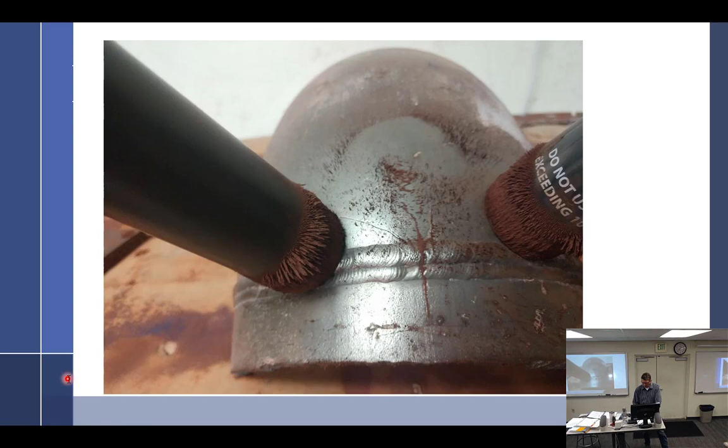Also called prods. So prods are handheld electrodes. You're going to hold them, put them on, clear, pull the button.

Is this direct or indirect magnetization? Direct magnetization. All right, direct magnetization, which is going to produce - would you say circular or longitudinal? Circular. And would the crack indication go this way, or this way? This way, yeah, okay then.

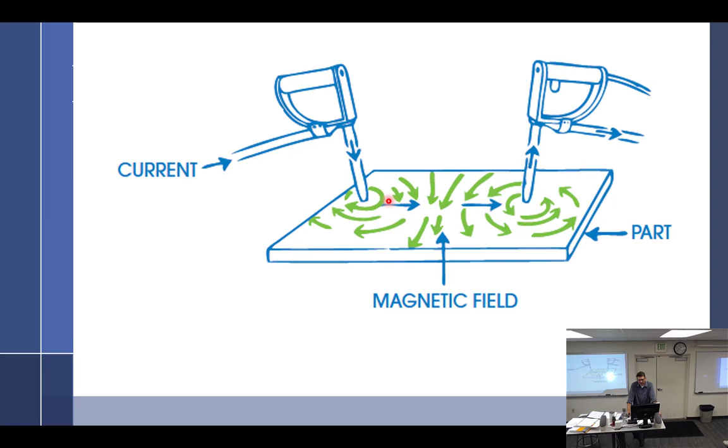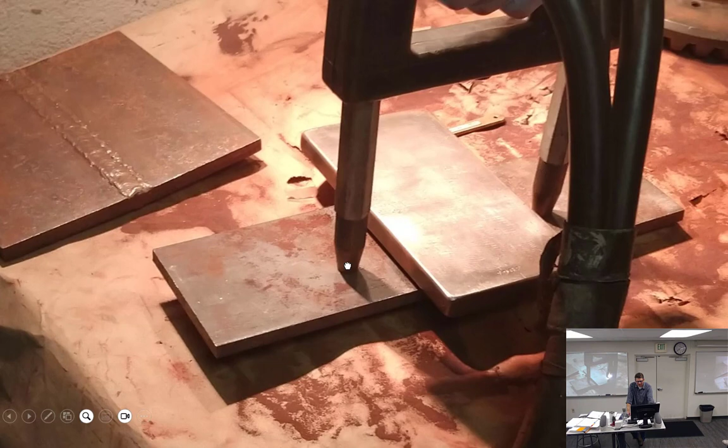So this is me trying to be silly. The indication would go this way, and I had this theory - what happens if you wanted to test for an indication going this way? But the problem is, you couldn't test this way because this piece is fixed and you couldn't change it, and the part didn't fit between.

So I thought, well, what if I put the prods here, and the indication is going this way, right? And I lay this on top. Would it transfer up and make the indication? It didn't work. And the guy's like, what are you doing? I'm just seeing something.

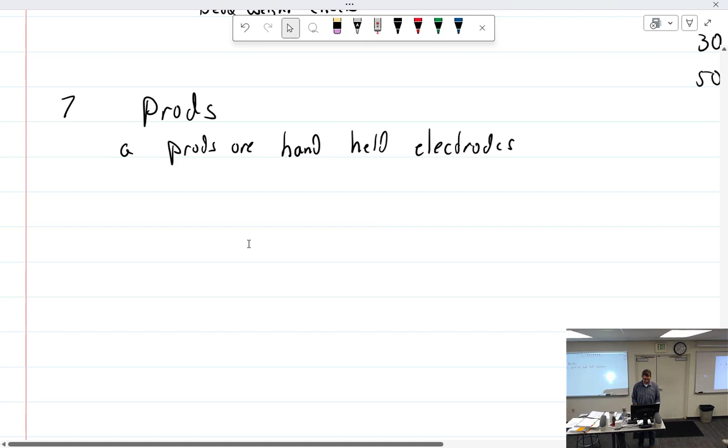What's that? You killed somebody on the table. It's the students who don't listen. Well, it's just rust. As the kids these days say, F around and find out. Maybe I did. What's that? Figure it out. Fool around. What does that stand for? We can't always... well, that's fantastic. All right.

See, current passes through the part. Through the part. Current is through the part. When we run current through the part, what is my risk? Arcing. Yes.

So this creates circular magnetization. Discontinuity shows parallel to the current flow.

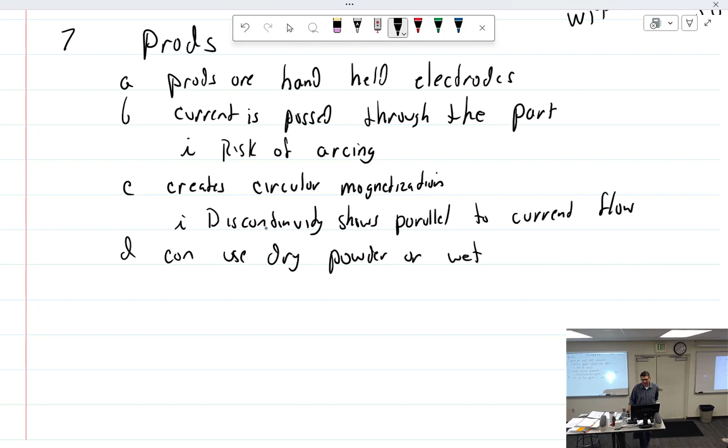As with the yoke, you can use dry powder or wet. So if you use wet, how are you going to get the wet there? Spray, those spray cans. So if you're using spray cans with an aerosol in them, and you have prods that are prone to arcing, and you're inside a closed vessel, or doing pipe welds or something, you have the risk of losing your eyebrows. You don't need those. We've all done it. There's only like a 1 in 4 chance they won't grow back.

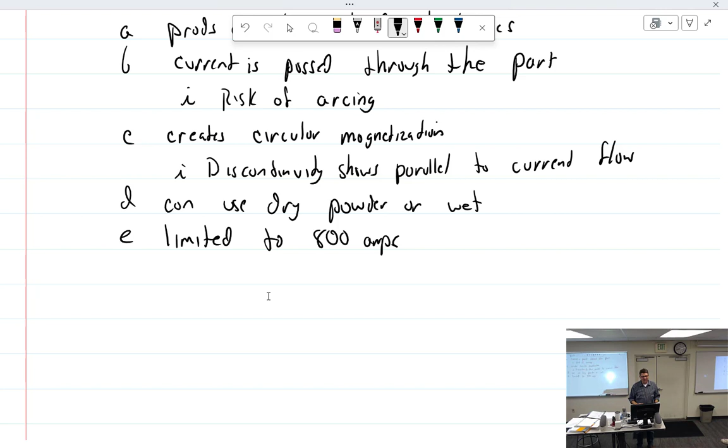Limited to about 800 amps. Why do you think it's limited to about 800 amps? So you can keep your eyebrows, more or less. Try putting more in that - the more amps you've got, the harder you're going to have to lean into it and get a good contact, or you'll start losing your contact.

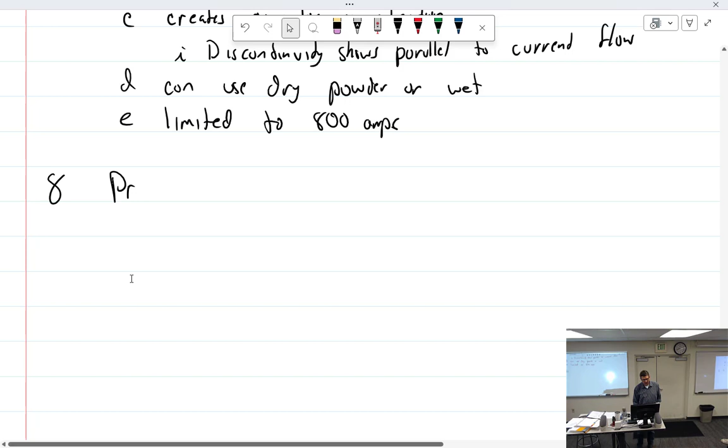All right, and we've really kind of gone over all of this already as we went through each thing, but I'll bring it back up again.

So I kept - there is a log in the lab, and I noticed I don't think anybody's been using it. Anybody been using it? For the Magnaflux? You guys start using it? Yeah, we've been using it. Write everything down.

Okay, excellent. So I kept a log in my shop with everything, every day. It did not matter what table 1 said to me about the intervals. And let me tell you why it didn't matter. Because number one, let's see.

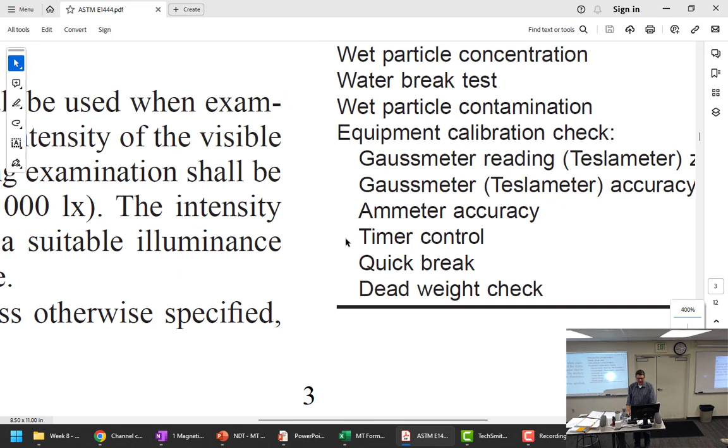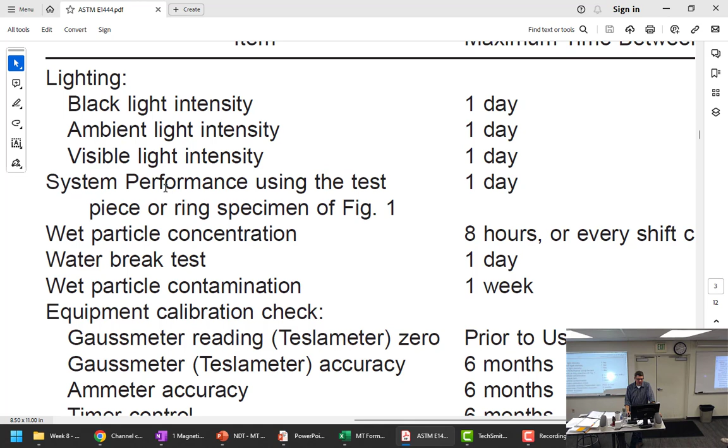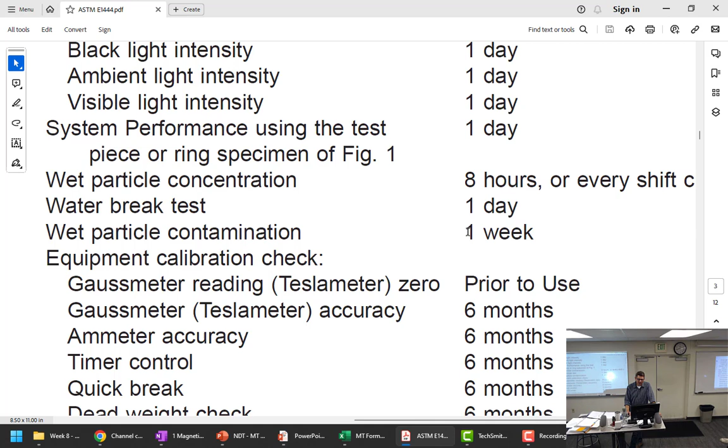I made sure that - I guess I pretty much followed this. I did check my black light intensity every day, ambient light every day, visible light every day, system performance using the Ketos ring every day. So I guess I followed that. Wet particle concentration, yep, every single shift. Water break test, never did that. Or wet particle contamination - I changed out my stuff, according to my boss, way too often.

However, we were only calibrating our machine every year, so there's a problem with that, right? Yes, so that would not meet this requirement. This is out of the ASTM, although I don't believe that the service bulletins we used reference this ASTM.

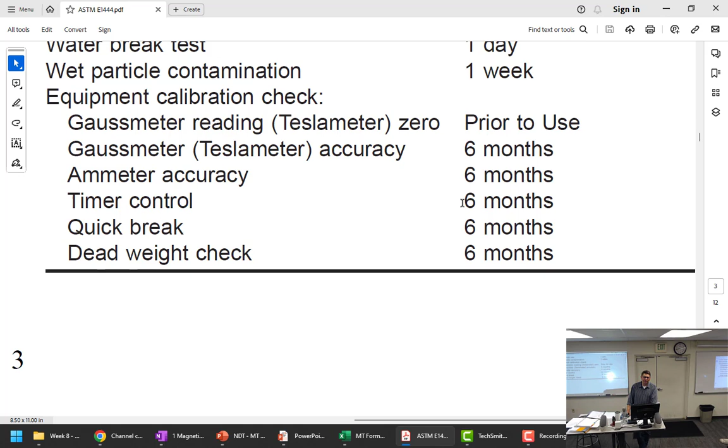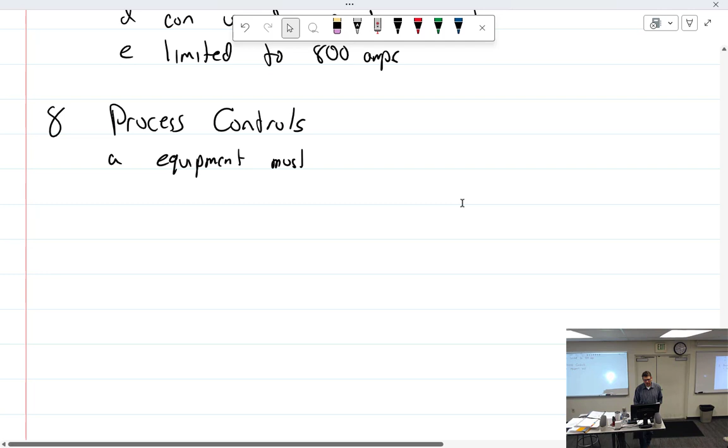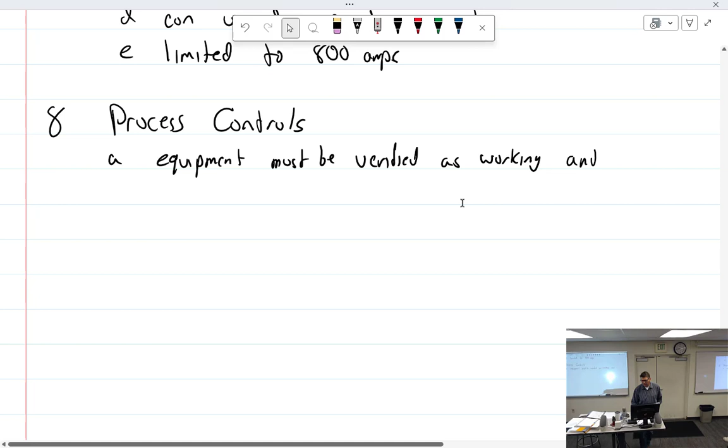So, process control - all right, so we have to have equipment must be verified as working and capable of detecting the desired flaw. I should say the undesired flaw.

What do you suppose happens if your process control is bad and it comes to light that you've been missing things you should have found? People might die. Let's say nobody dies, or somebody does. Then what happens next?

They embarrass you pretty well. When you get into airworthiness directives, especially on smaller aircraft where smaller shops work on things, you probably won't see this on Boeing or Airbus. But in places where smaller things happen, you'll see a lot of shops mentioned by name in airworthiness directives. Like crankshafts - any crankshaft repaired by Nelson Balancing Services between this date and this date shall be removed from service because they were doing something wrong. Larry mentioned there's a place in Stockton that just had ADs come out on their prop work. You'd be surprised how many shops are named by name.

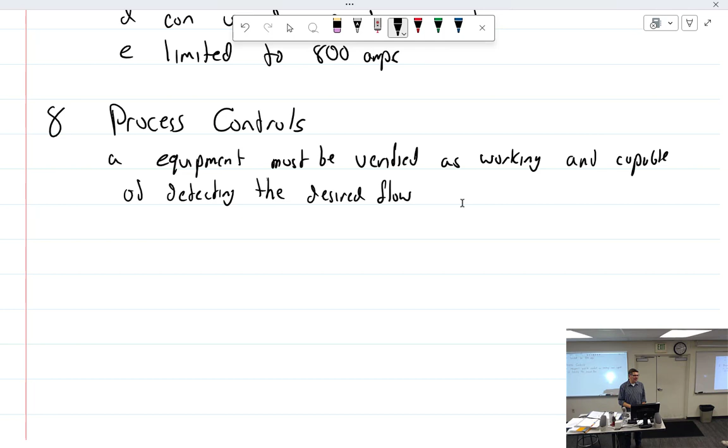How long do you suppose that AD is out there? It's not like they go away - they are there. That's why I remember Nelson Balancing. Why do I know that name? Because I've been looking at it for 30 some years now.

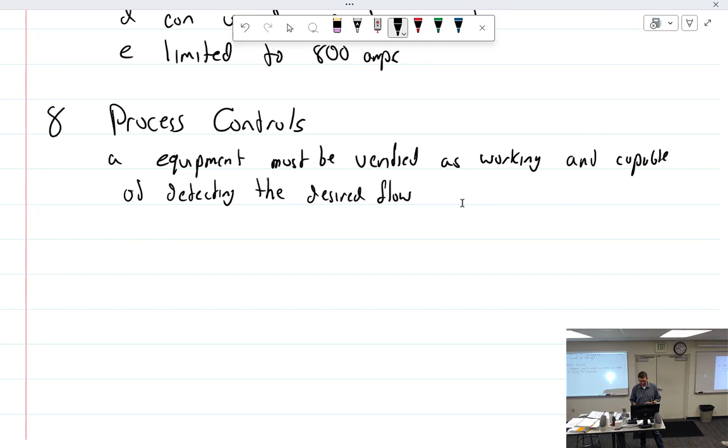Every time I do an annual on my plane, I go through - nope, that one's N/A because my engine was not overhauled. Is it still crankshaft by Nelson? I don't think so. Probably not. All right, time to change the name of the shop.

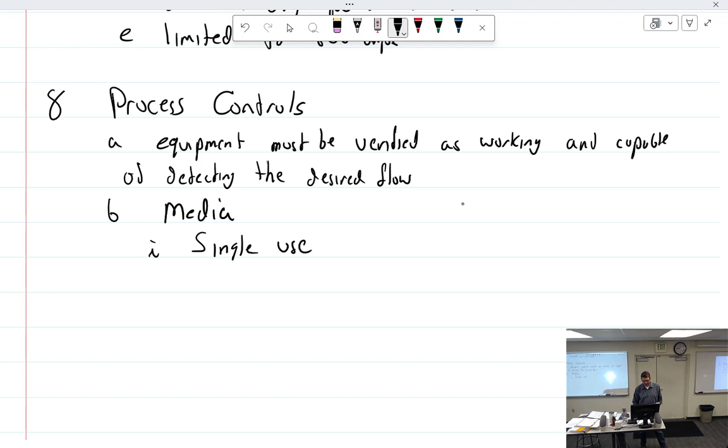So obviously we're going to check the media. The dry powder or the aerosol is single use. Even though you see me pick it back up and put it in a jar, it's single use. That includes aerosol cans.

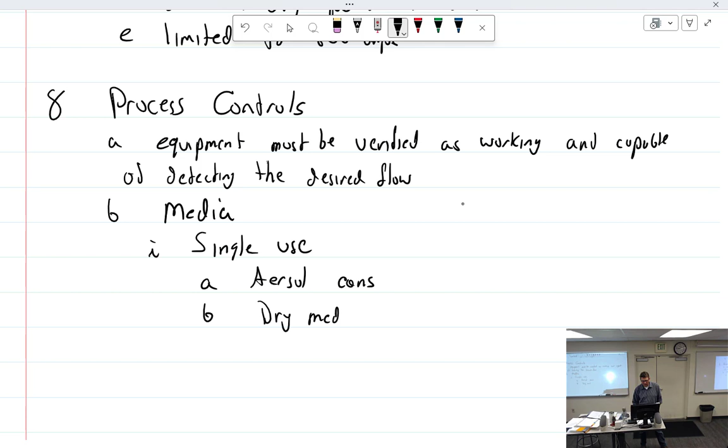You don't put the stuff back in the aerosol can? You can try, it's hard to get in that little hole. Single use - I know you see me reuse it because I'm cheap. We're not supposed to.

All right, it is assumed to be good - uh oh, there's that word, oh no - assumed to be good if used by expiration date.

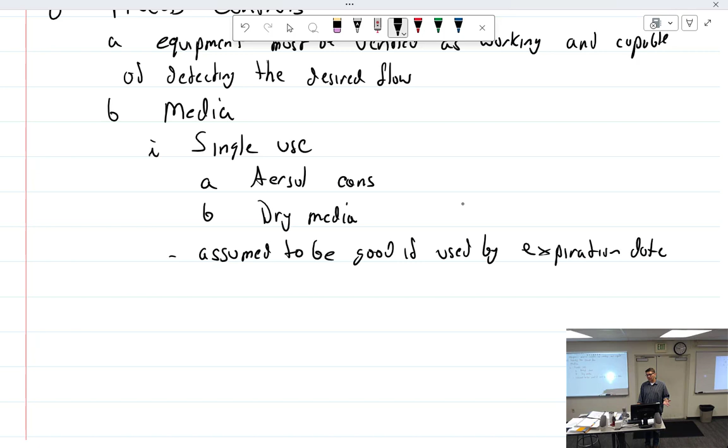Now this is my thing. It will depend on what the expiration date says. If it says 'best when used by,' that's not an expiration date, because it goes best, better, good, gooder, questionable, and then I guess feed to kids and see what happens. My family's so mad at me because I'm always on them - you threw away that, it said best when used by. What comes after best? Best, better, good. So that's the joke.

It will say 'expires on' and have a date on there. So it's assumed to be good if used by the expiration date.

What about sour cream? When it goes bad, does it get less sour or more sour? Oh man, that sounds gross. It starts to look like... you know what I keep telling my kids and won't buy it? You know what tastes really good is lemon milk. Try it, it's delicious - no, it curdles it. I did try that. Oh yeah, toothpaste flavored orange juice, my favorite.

All right, the media in the bath - how often is that checked? Take a bath? Yep. Every 8 hours or shift change. What if the shift never changes? Then every 8 hours.

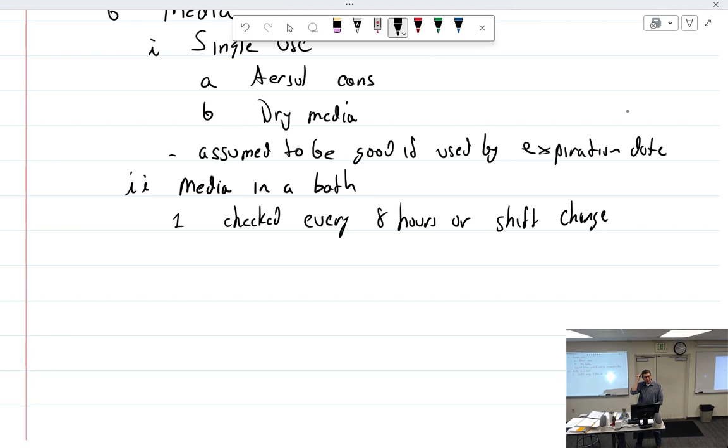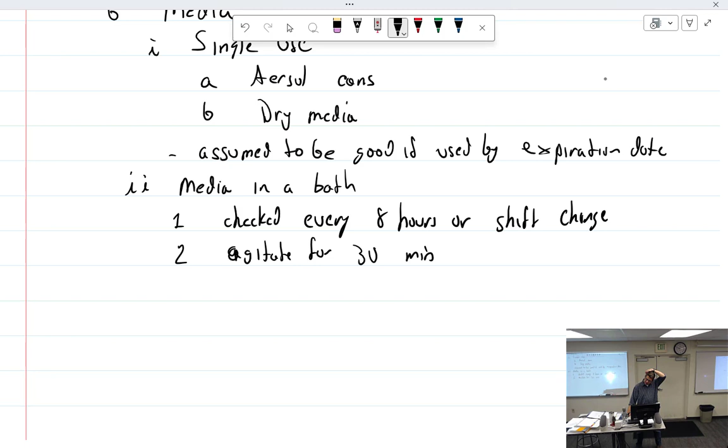So to check it, we have a procedure. We're going to agitate it for 30 minutes. If you don't know what agitate means, ask Cooper, because he manages to agitate me for pretty much 2 hours a night. You got a break yesterday. I know, it was boring.

So to turn on the pump, let it run. Down there the pump runs and agitates it constantly. We're going to agitate it for 30 minutes.

We're going to place a sample - obtain a sample in a 100 milliliter centrifuge.

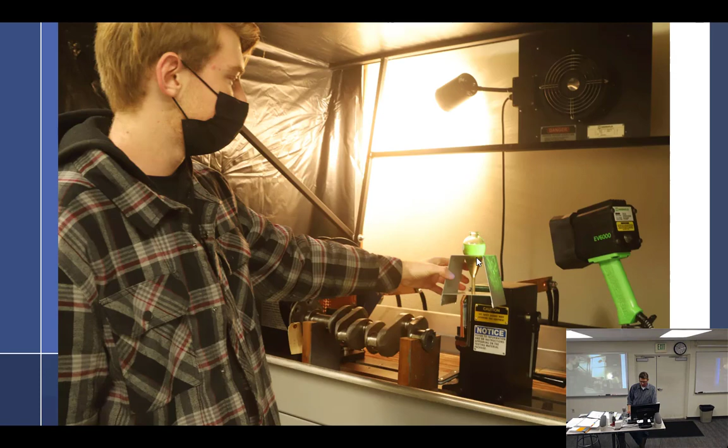So we take a sample - let me see, oh, that's not what I wanted at all. Sample, and there we go. So 100 milliliters, and we're going to let it set for - oh, I forgot a step.

We are supposed to demagnetize that sample. How do you do that? Oh, I guess you put it in the... put it in a coil, put it in the heads. Just take the yoke and just... I fail to see what's wrong with that.

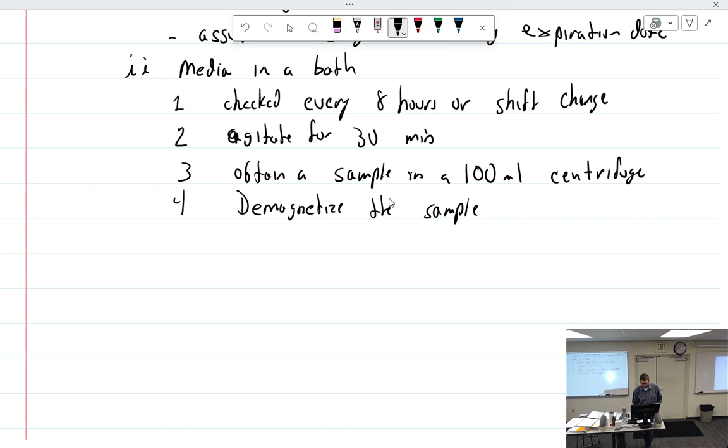All right, so - demagnetize, let stand for 60 minutes, it says minimum. And that's for oil-based, which is what we have.

This is kind of a weird thing. If you let it set overnight, it really settles and you get quite a bit more than if you let it set for 1 hour. It's still sort of in the jar, kind of floating around. I like to take it right about 60 minutes, between 60 and 90 minutes, and that's what it is. I don't want it to set overnight because these particles settle down in there and pack in so tight you can't get them out the next day. It's really crazy - I put my thumb over the centrifuge, turn it upside down, shake it, and those particles just stay. I've taken brake cleaner on a straw and sprayed it in there, nothing. The only way at that point is to get a little tiny rag on a welding rod, shove it in there, stir it up, and pull it out.

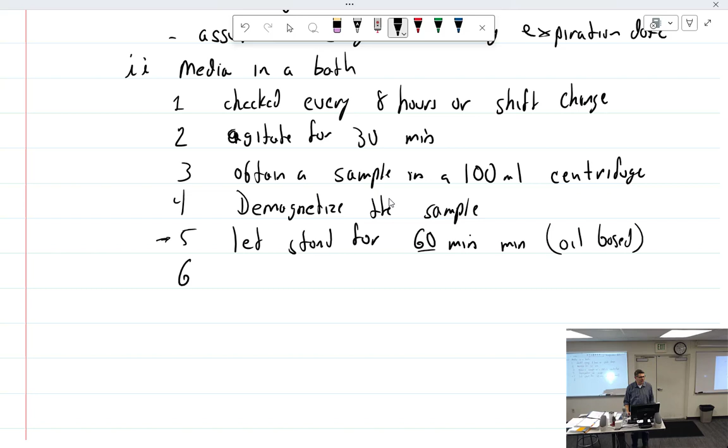Just try a magnet. Yeah, I haven't thought of that. Because I could just see it going against the glass - clink!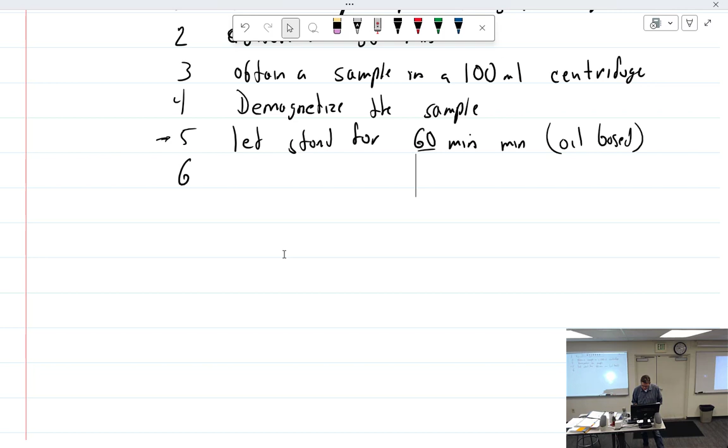I have another centrifuge, please - one of those little tiny ones. And the centrifuge is single use for the opening of it. And it's all stuck to the thing.

Examine under black light and compare color and particles to an unused sample. Yeah, good luck with that - they look the same.

And our concentration should be 0.1 to 0.4 ml. 0.5 is right there, 0.1 is right there, and this is 0.25 right there. So I like it just a little over the 0.25 after about 60 to 90 minutes.

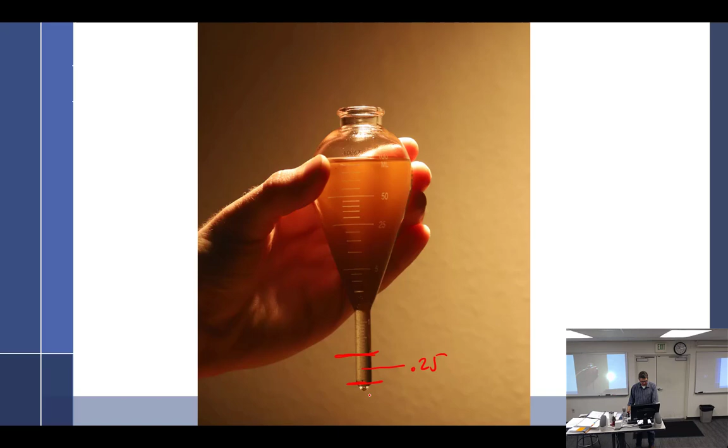Very artistic shot. Well, you like that? Can you see it?

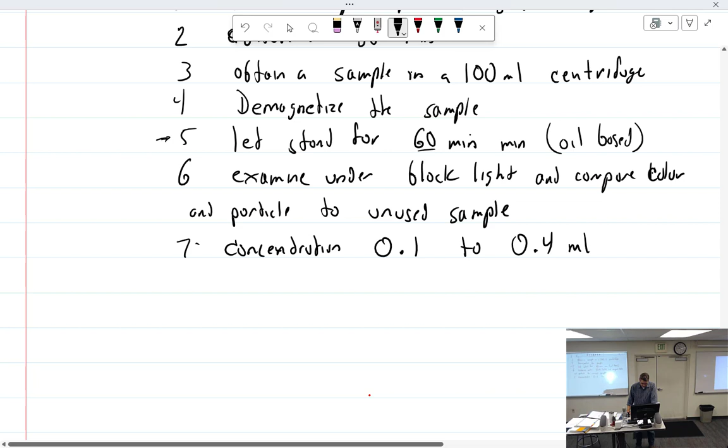Yeah, let's see - media bath, we got that. Machine operation.

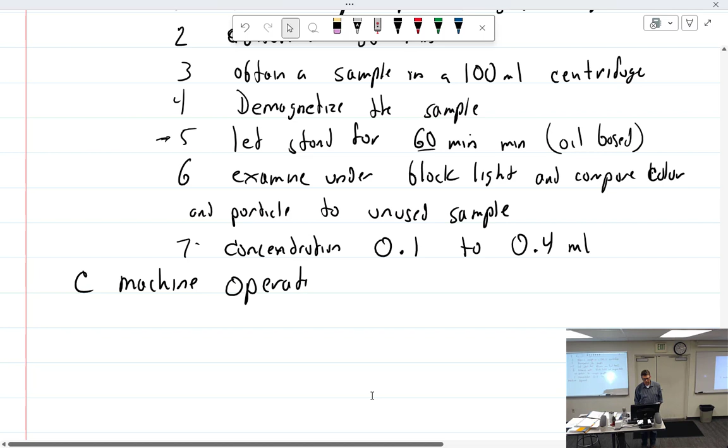How do we check our machine for proper operation? By using it - we'll talk about the bench. What do we test it with? The Ketos ring. How often do we test it? Daily, just in case it lost some of the battery and fell out. There we go - Ketos ring, which I think everybody's had a chance to see work now, hopefully.

So we're going to check it DC at 1400 amps, 2500, and 3400 - we should get 3 indications, 5 and 6. The thing that bugs me about the ASTM is it says to check it on DC. It does not say anything about checking it on AC. And these are old ASTMs. I had an AC only machine, so I still checked it and made sure I had at least 3 or 4 showing at 2000 amps, but technically, to follow that ASTM, you'd have to have a DC machine - but then you didn't check the AC function, which just bugs me.

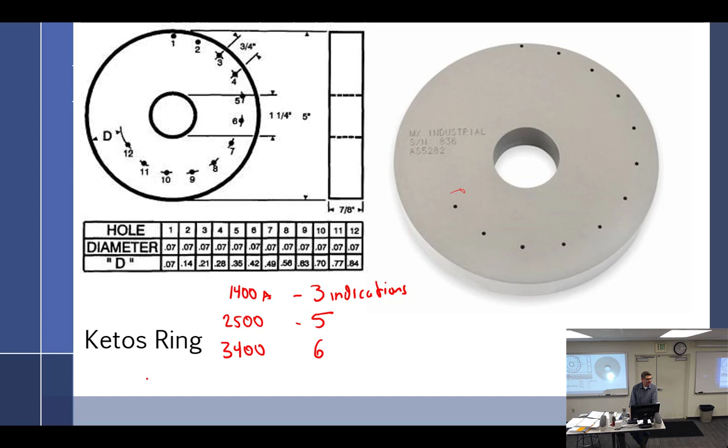So what I'm curious about is what is the cutoff for what you consider to be an actual line on the Ketos ring? It starts getting fuzzier and fuzzier. Yeah, but that's what a subsurface indication looks like. I try to be careful because you do get confirmation bias - you see where the hole is, and then you can look and go 'oh, of course I see it.' It's like, of course you see this one right here.

Let's see, you see that one. I mean, but you wouldn't see that if it was a crankshaft you'd been examining for the last 10 minutes - you'd probably just pass right over it. I don't know, it depends. You see the next one too, even. Yeah, you can. So it's where that cutoff is where I'm kind of curious.

I just say if it's visible. It's counterintuitive - you have to understand what an indication would look like that deep down, and that's what it would look like, so I count that. It's kind of a training thing, like training your eyes. It is very much so - yeah, I guess I never said that, but it's very much training them.

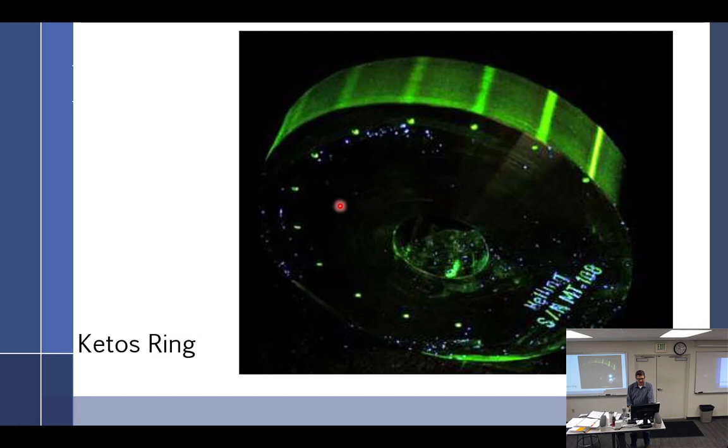Oops, let me see. All right, so bench - Ketos ring daily. We tested on a bar at 1400, 2500, 3400 amps, giving 3, 5, 6 indications. The other thing we can use is something with artificial discontinuities.

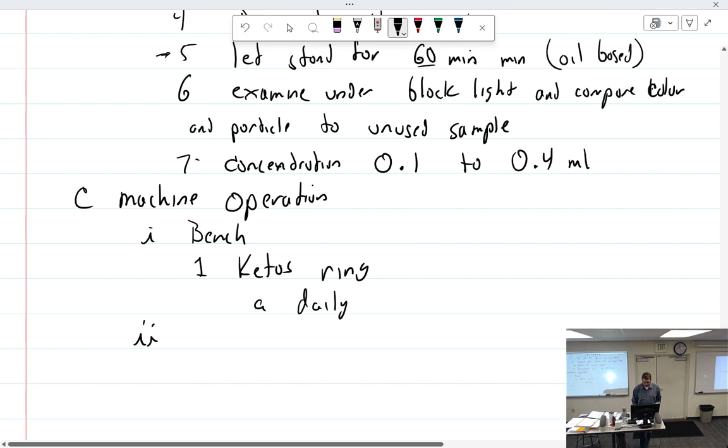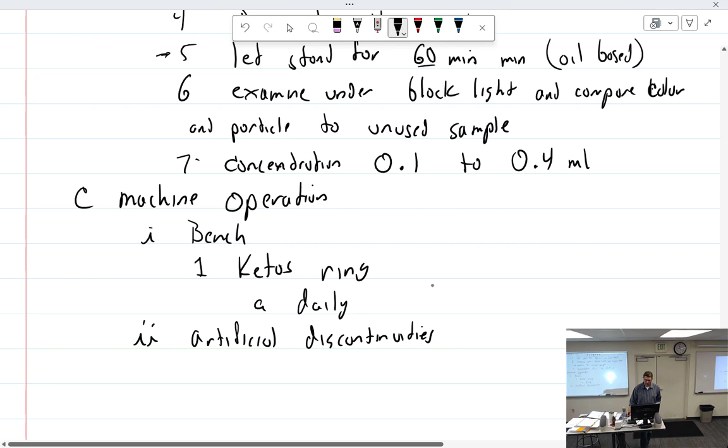Which is something we could use daily. And these would include a pie field indicator.

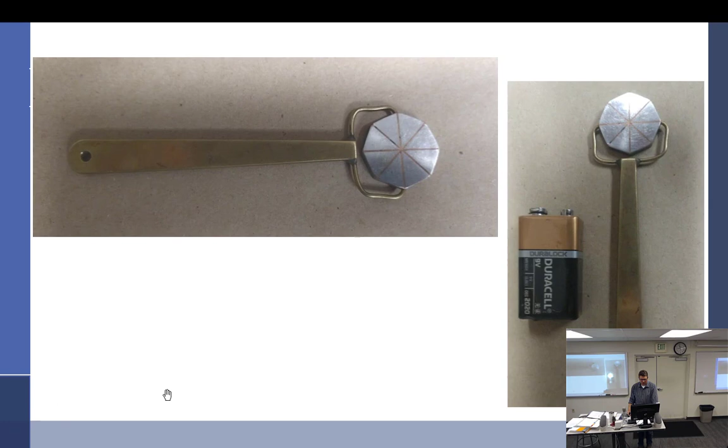So the other side, do I have a picture of the other side? Let me see. I do not. So the other side is just the copper piece.

So I saw one publication said this side would be more for testing surface discontinuities because it represents the surface. So you have pieces of ferrous metal in between non-ferrous metal, some copper in there. So these indicate cracks right here and will work as cracks. Or as I showed you, you could flip it over, which still works because they're so thin that you can use that for surface discontinuities too. Either way, it'll show you which way the field is going to go, and how many lines you get - you get 1 line, 2 lines, 3 lines, and you don't get the 4th. It's almost always the way it is.

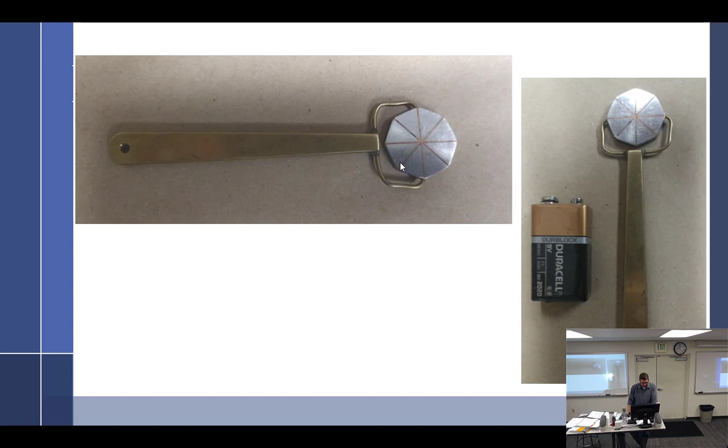So we can use the pie indicator, or we can use QQIs. QQI, I'll write it down. Qualitative Quality Indicator, QQI. And what they are, they're little stickers.

So I had some somewhere, I just don't know where I put them. Qualitative quality, I'll write it down. Qualitative Quantity Indicator - Quantity. Nope, Qualitative Quality Indicator.

So they're just small little metal stickers that you'd peel off and stick to your part in an area that you can't inspect under. Then when you put it in the magnetic particle testing machine, depending on what you did - if we did a headshot, this line would show up, and if we got a coil shot, it'd be this line, referencing the way I'm standing, and you would get part of the circle, I would assume. So you would see that these indications would show up on the part as you're inspecting it. I think that's all I have for these.

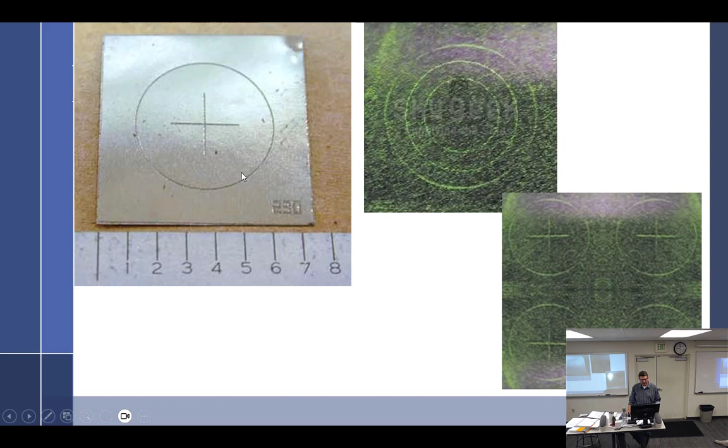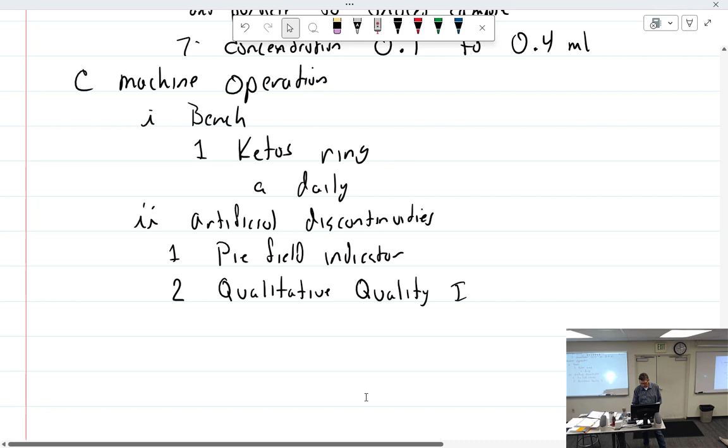So, artificial pie field indicator and QQI, small metal shims.

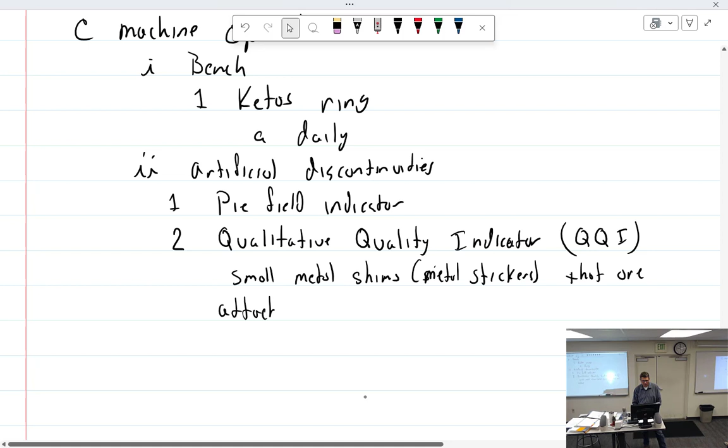I don't think shims is a very good word, because you're not shimming anything. I'll put stickers - small metal stickers that are attached to a part.

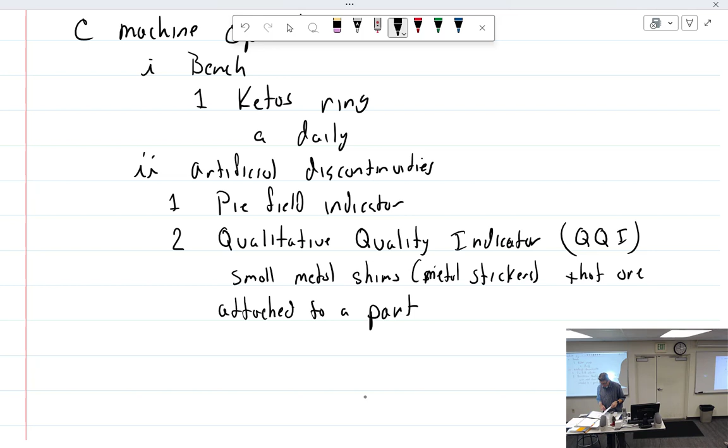We already talked about the lift test. Lift test for which parts or which things? Yoke, magnets, and the prods.

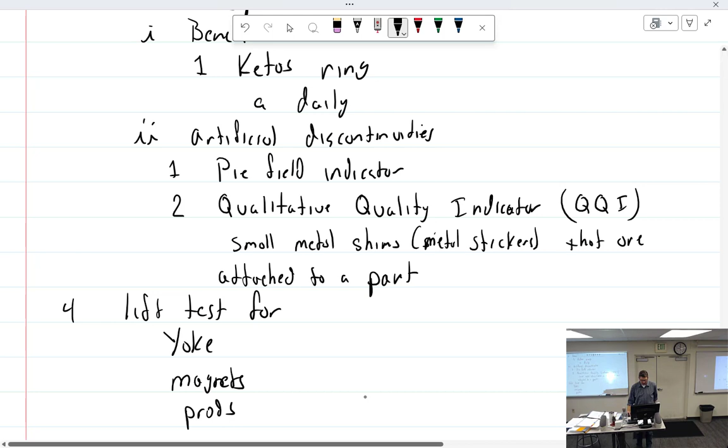And we talked about lighting. So for visible inspections, we need what? 1,000 lux. Or 150. Minimum of 1,000 lux visible, which is 100 foot candles.

What about for fluorescent inspections? Maximum of 20 lux. What is my maximum white light? 20 lux, maximum white light, 20 lux or 2 foot candles. Black light: minimum 1,000 microwatts per centimeter squared at 15 inches.

And no cracks or damage to the filter. I have some health issues. Now he tells me about health issues.

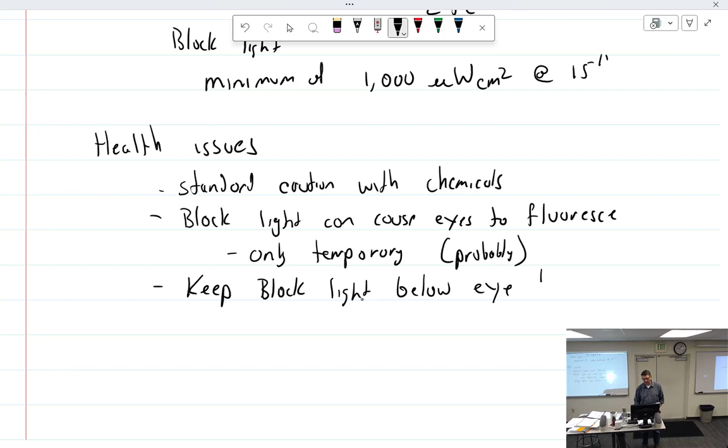So for that reason, you want to keep the black light below eye level, like the one I hung up. Be cognizant of reflection of black light.

Yeah, you probably don't want to wear a white lab coat. Well, if you have it at a certain angle, it'll bounce off. Yep, bounces back up at you. I just throw glasses on and everything's red - it looks so cool. You straight up look like doctors and scientists, like when they walk around with blue white lab coats. That's what we are.

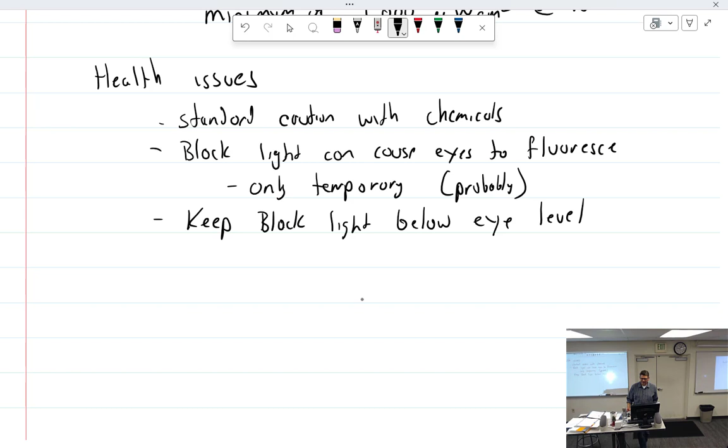All right, the rest of my notes are going through the procedures, which I had to do before because we didn't have anything. We didn't have a machine to do it with, so we just had to talk about it. So we did good.

Let's see, you guys are out the test. What did we do before? We had a very weak one that we could only use the rattle cans on, and I think it only went up to like 500 amps at best. And so you'd put in a grossly cracked crankshaft.

This book here is another book that I just checked for that formula, and it actually spells it out much nicer, and it uses the 10 minus t divided by 8 in just that bracket. It's the same thing. Checks out. So good.

Let's see. Dry particles are more sensitive for detecting discontinuities beneath the surface and are usually used with portable equipment. I highlighted that. I agree.